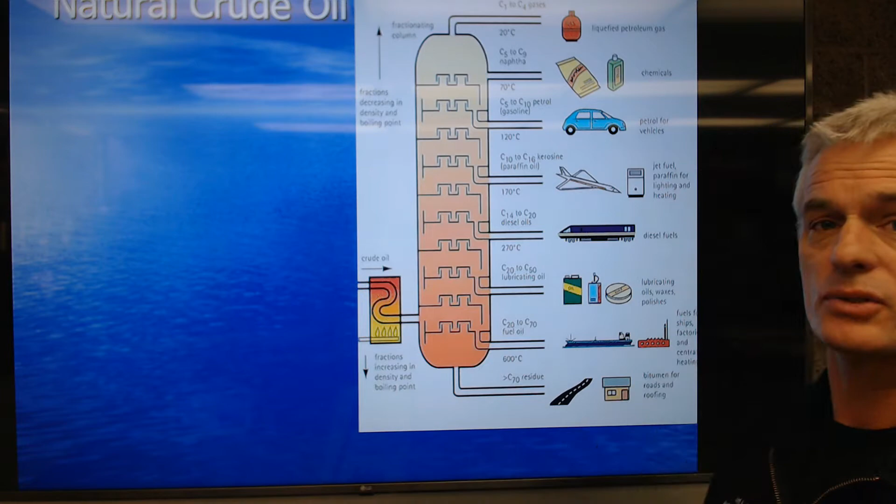So what we've got here is something called a fractionating tower, which gives you an idea of how we break crude oil into all different kinds of components. We get mixtures of what they call semi-solids, liquids and gases.

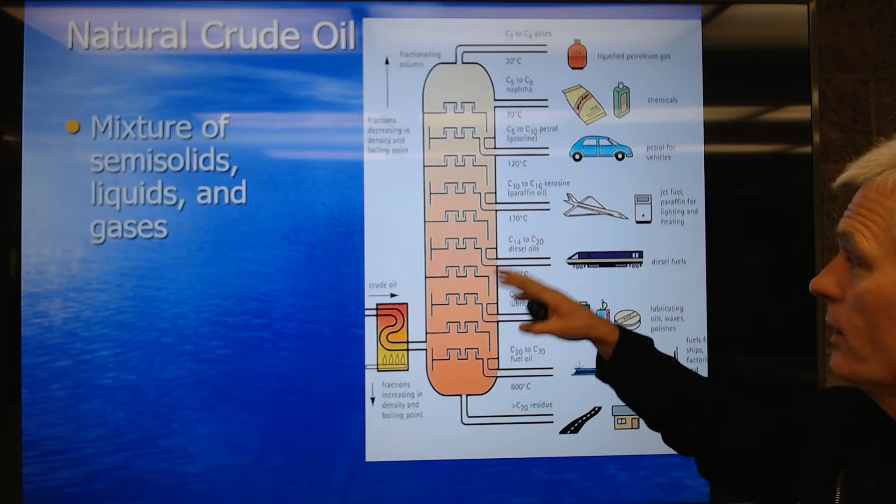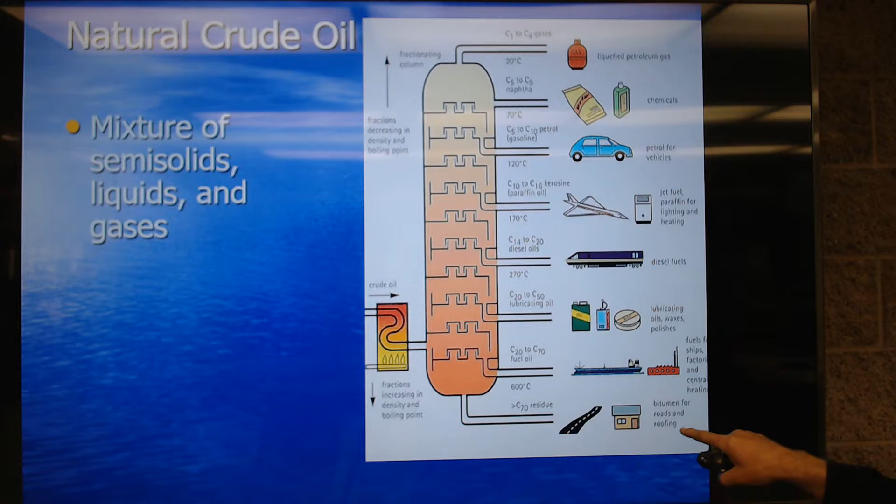When they put oil into a fractionating tower, they heat it up. The heavy stuff stays at the bottom, the lighter stuff goes up. So way up at the top is LPG. Way down at the bottom is things we use for roofing, roads, lubricating oils, waxes and polishes and things like that.

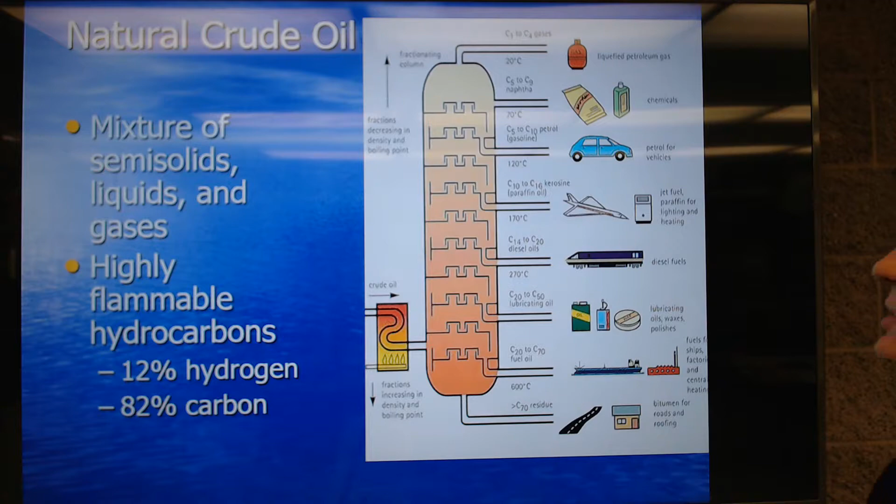So we get highly flammable hydrocarbons from crude oil, about 12% hydrogen and about 82% carbon. I'm just interested in you understanding how we get fuels and things, and what other kinds of things come out of crude oil.

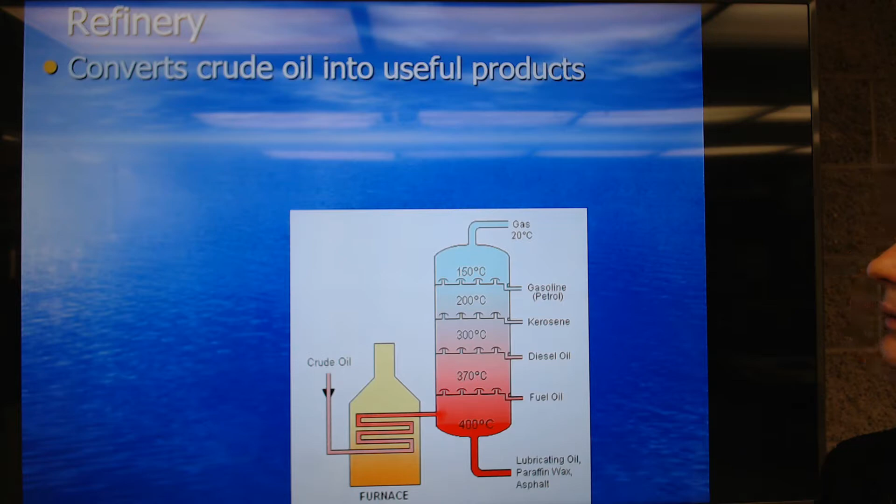So a refinery - your notes can be pretty simple on this - is going to convert crude oil into useful products through what's called a distillation process. To distill crude oil we use a fractionating tower, where we just heat up the crude oil.

Again, the lighter parts will go up, and the heavier parts stay down. So heavy fuel oil, burned in ocean liners and things like that, is down here at the bottom. Diesel oil is a little more refined. Kerosene is pretty similar to diesel, just slightly more refined. And then gasoline, or petrol as they call it in foreign nations, is a more refined fuel at the top.

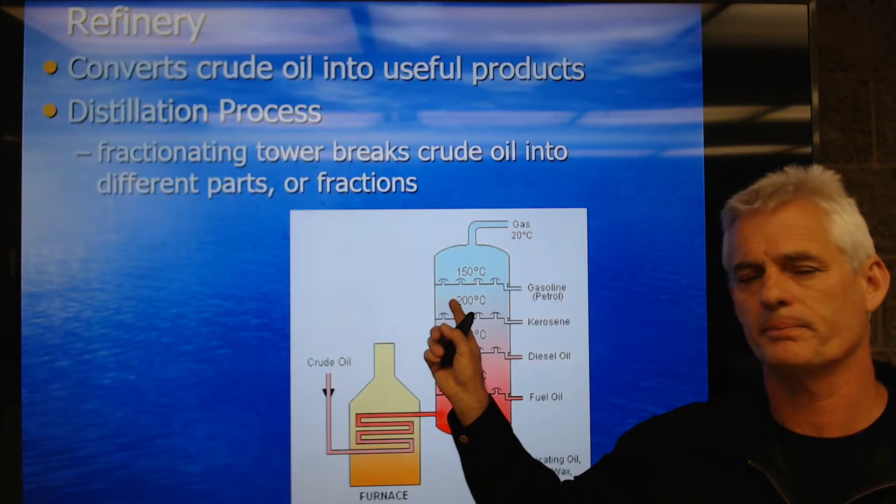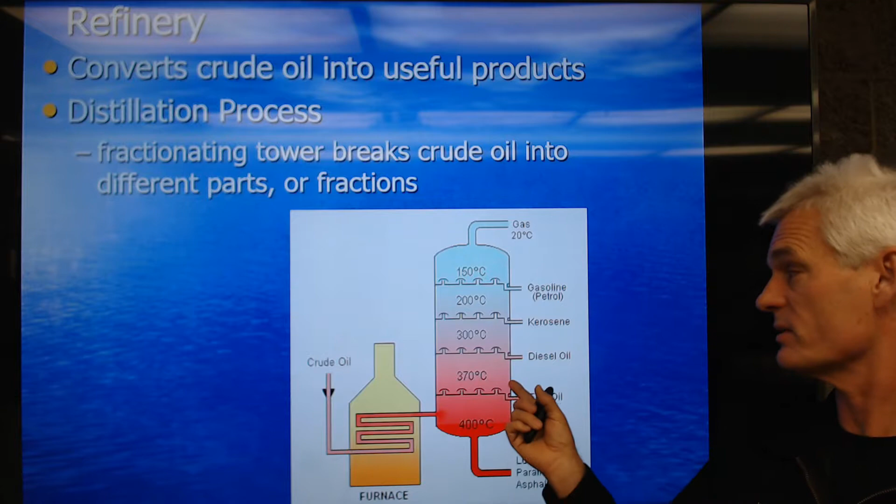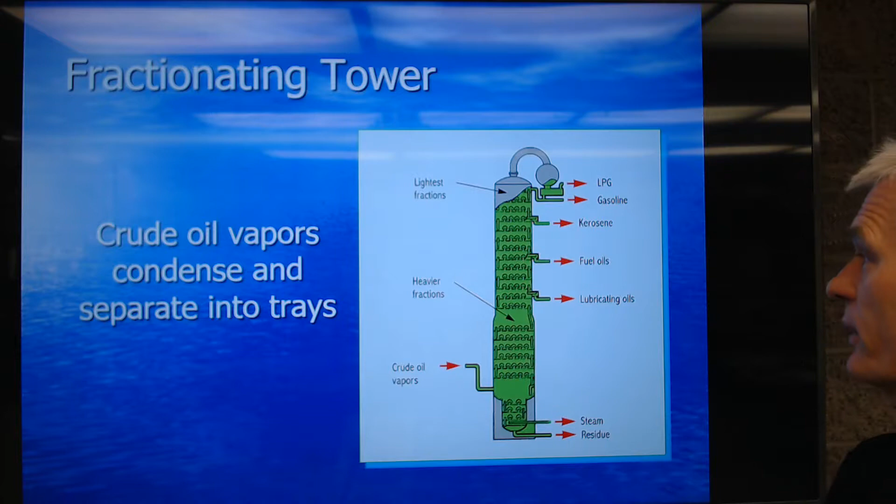In terms of cost, this is my educated assumption, the higher you go in the fractionating tower, it's probably a little more cost involved, but that's not necessarily true. In terms of distillation, diesel fuel actually has more energy in it than a gallon of gasoline, so that's kind of interesting. This is just another picture of a fractionating tower showing how they separate things into different parts as they heat it up.

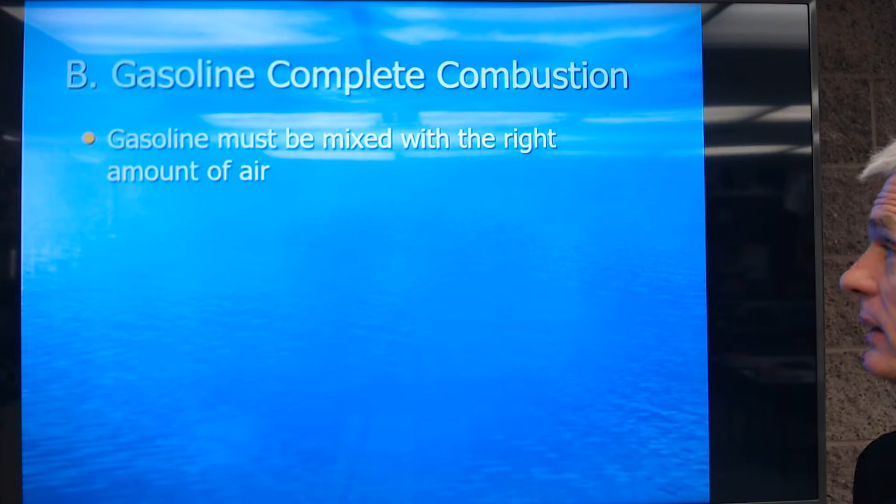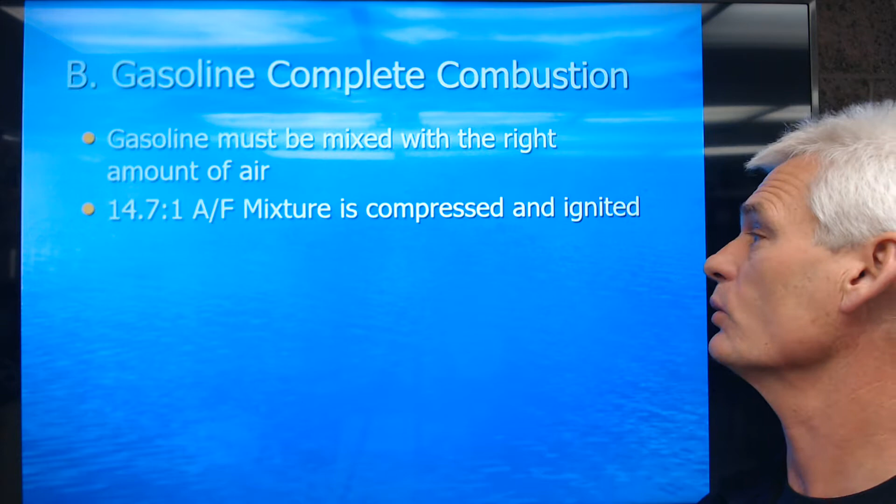So let's talk a little bit about gasoline complete combustion. We want to mix gasoline with the right amount of air, and at sea level, what we call the stoichiometric air-fuel ratio is approximately 14.7 parts of air by weight to 1 part of fuel by weight. So obviously by weight, that's a tremendous amount of air to fuel. We call that the stoichiometric, or chemically correct, or ideal air-fuel ratio at sea level.

Obviously when we burn air and fuel, we produce heat, and that heat is going to cause gases to expand. That expansion of gases causes pressure, and the pressure pushes the piston down on the power stroke of our 4-stroke cycle.

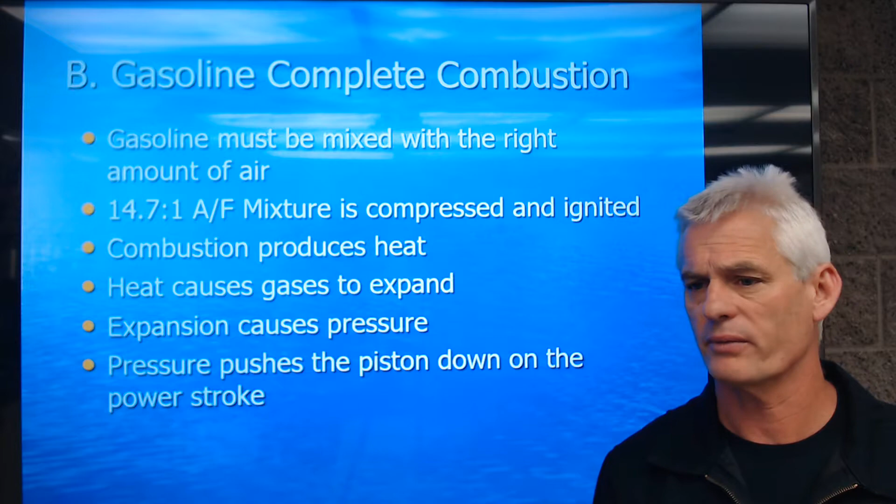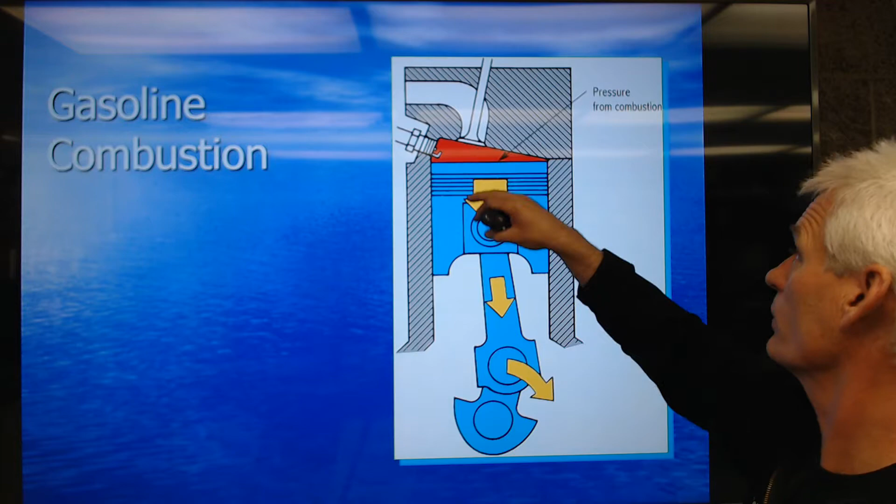So gasoline combustion looks typically like this: we have air and fuel being compressed into a highly explosive mixture. We get a spark, and as we explode, expanding gases are going to force the piston down. So normal combustion - again we're talking about gasoline engines, not diesels.

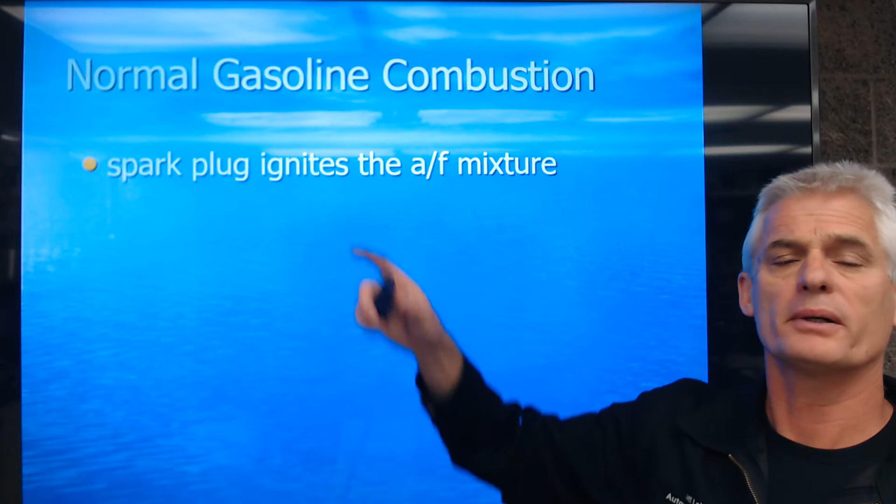A spark plug is going to ignite the air-fuel mixture, which again is around 15 to 1 or 14.7 to 1, ideally at sea level.

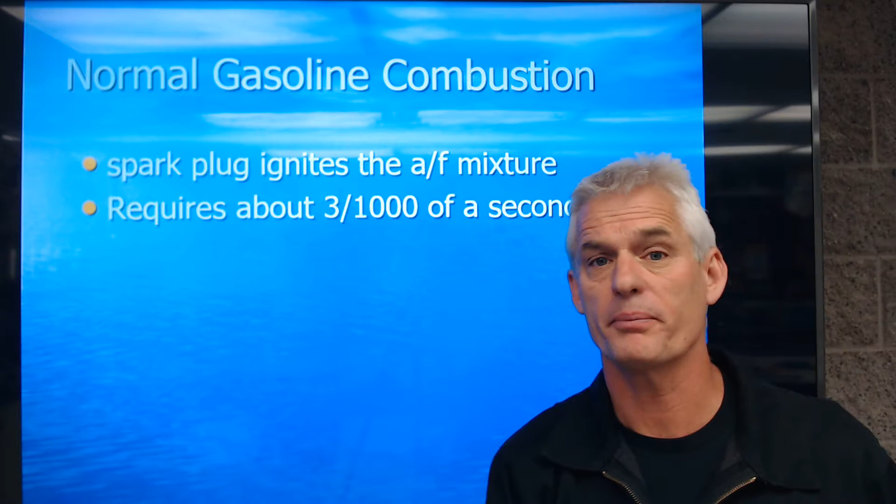It takes about 3/1000th of a second to ignite the air and fuel, depending on the RPM of the engine. Max cylinder pressure is reached a few degrees after top dead center (TDC) on the power stroke. The faster we spin the engine, the earlier we have to cause the spark to occur, so we have more time as the piston comes up for the explosion to be ready to push it down at the right time.

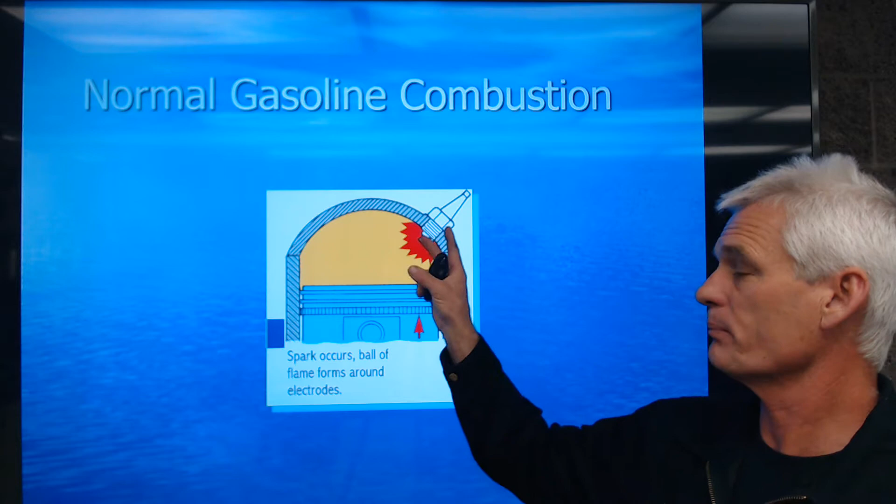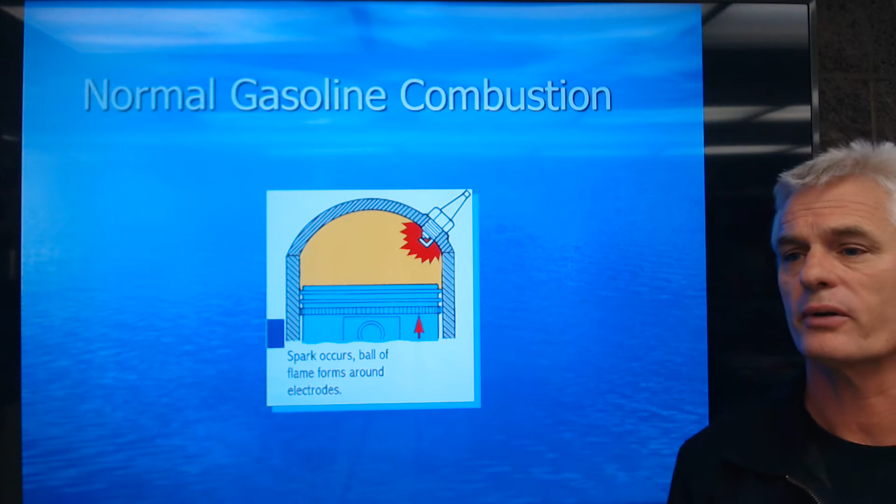This shows normal combustion, where you get a flame front beginning at the spark and burning across the combustion chamber. This would be a hemispherical combustion chamber design, or what we call a Hemi. It's really good for power and really good for emissions, and most engines today use a modified version of this.

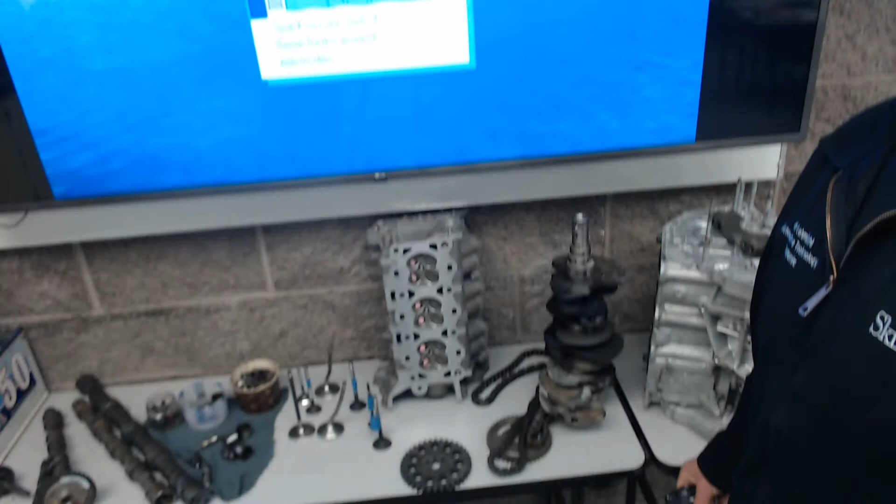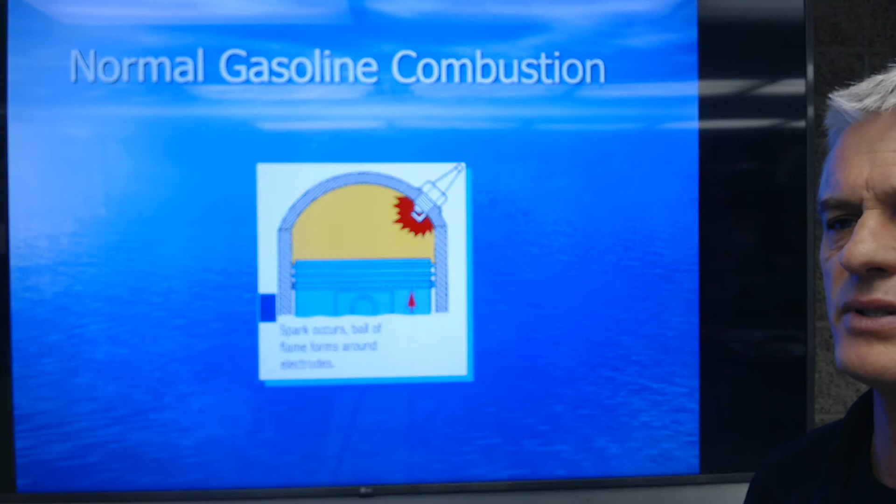I'm going to move the camera down so you can see that this Ford Duratec cylinder head has what we'd call a modified Hemi. It's not a true hemispherical, but the valves are canted in right and left like a Hemi, and the spark plug comes down the center like a Hemi. So it's a modified hemispherical design, and everybody seems to have some version of this to affect how combustion happens in the cylinder these days.

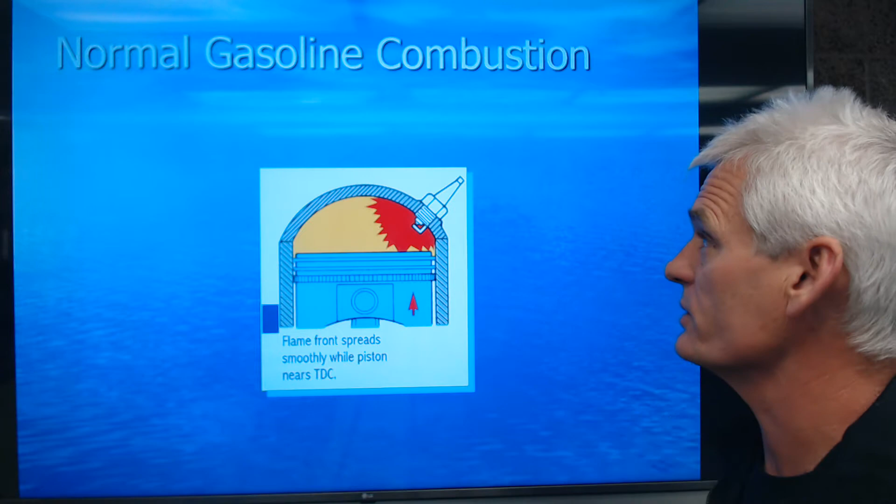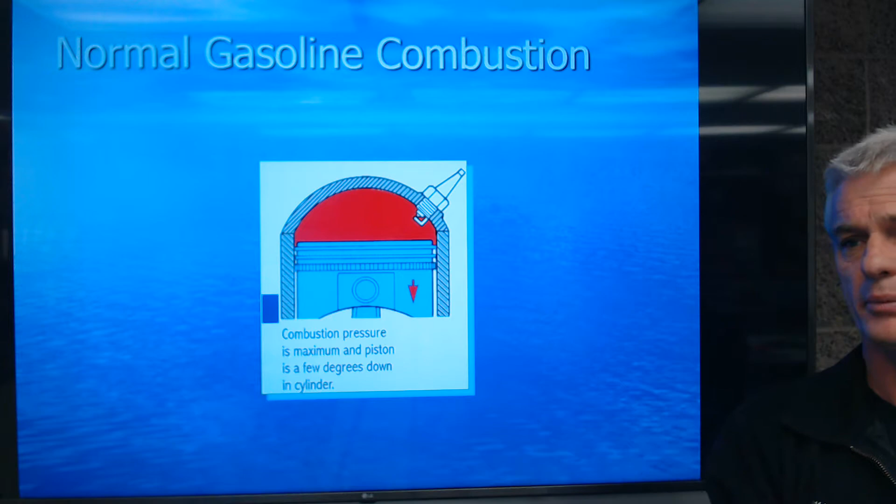This shows how, as normal combustion occurs, the flame front proceeds across the combustion chamber. Once the piston reaches TDC, the flame shoots through the chamber, forming heat and expanding gases, which push the piston down. That's all they're showing here—kind of belaboring the point, I know. Let's keep going.

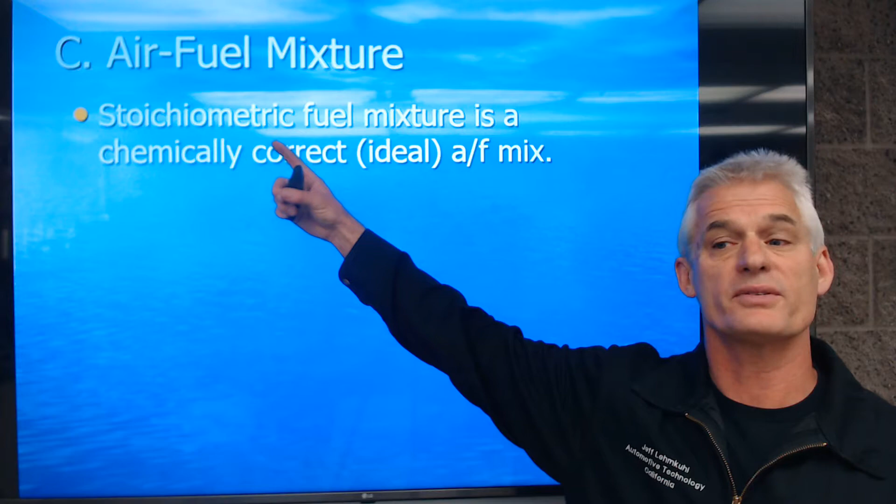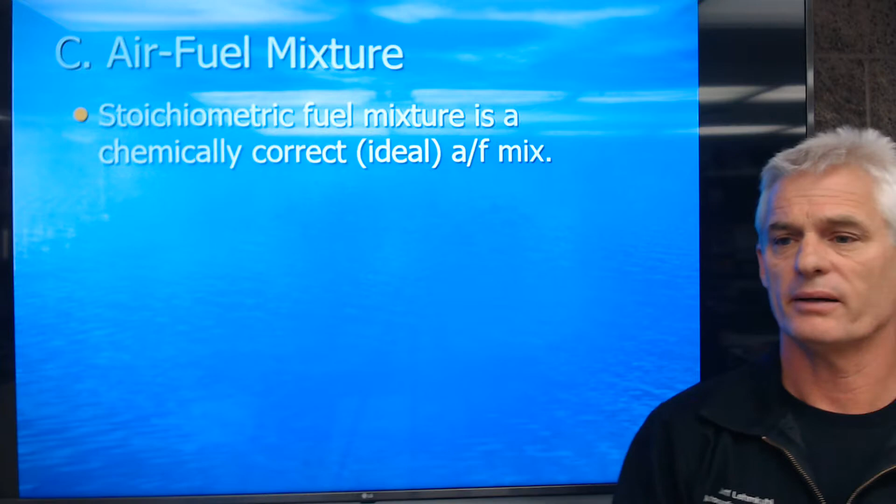Our ideal air fuel mixture—the one that produces as much power as possible, gets the best gas mileage, and produces the least emissions—is what we call stoichiometric, meaning chemically correct or ideal. The ideal mixture is 14.7 parts air to fuel at sea level, by weight.

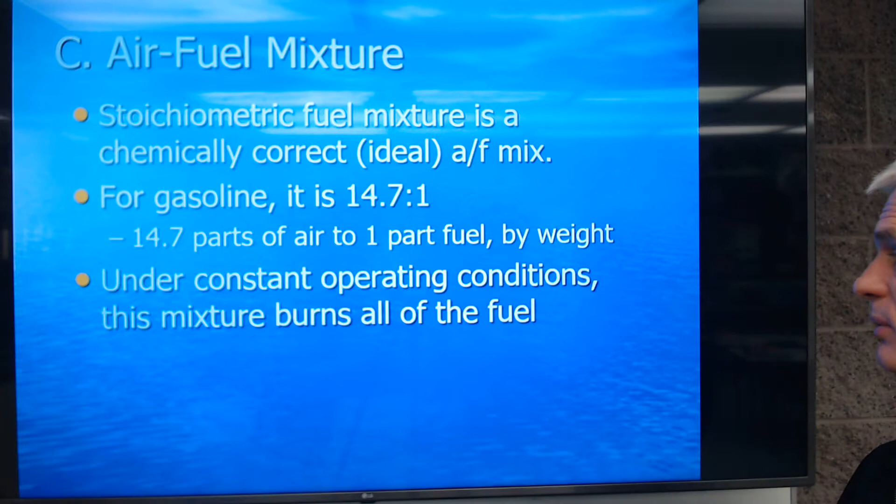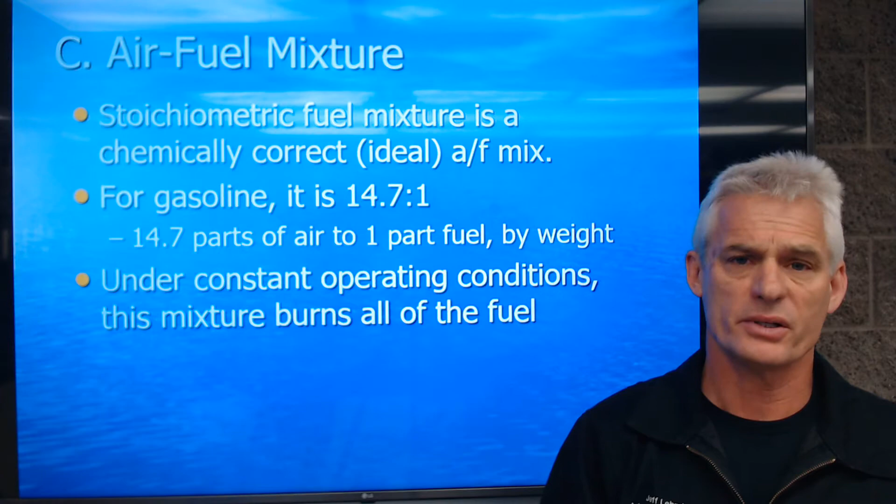Under constant operating conditions, the mixture is said to burn all of the fuel, but that's not really the case. We don't burn all of the fuel—we always have some leftover hydrocarbons and other pollutants. We'll talk about that in a moment, but that's pretty normal.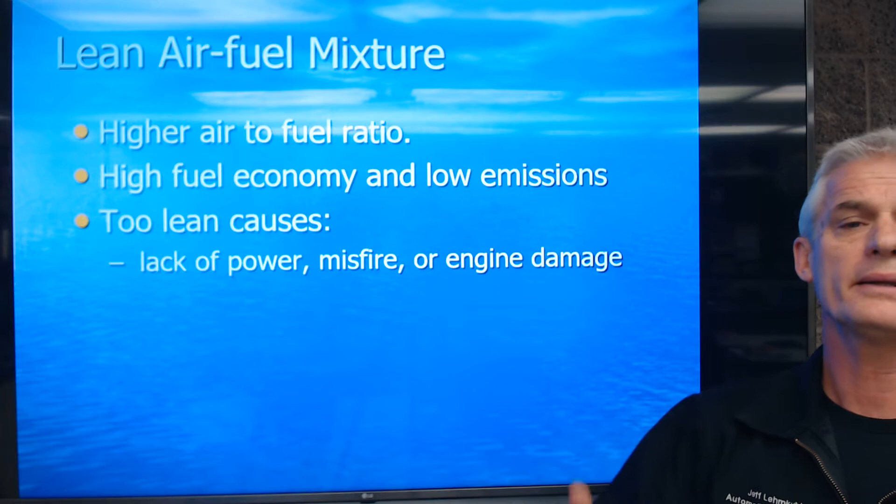A lean air fuel mixture means a higher air to fuel ratio, like 15:1 or 16:1—more air relative to fuel. This gives really good economy and mostly lower emissions, lower hydrocarbons and carbon monoxide, but if it gets too lean, hydrocarbons go back up and you make too much oxides of nitrogen, another pollutant. Too lean causes lack of power, misfire, and potentially engine damage if it gets really lean, because lean mixtures raise engine temperature—more oxygen means more heat to a point, and that can melt things.

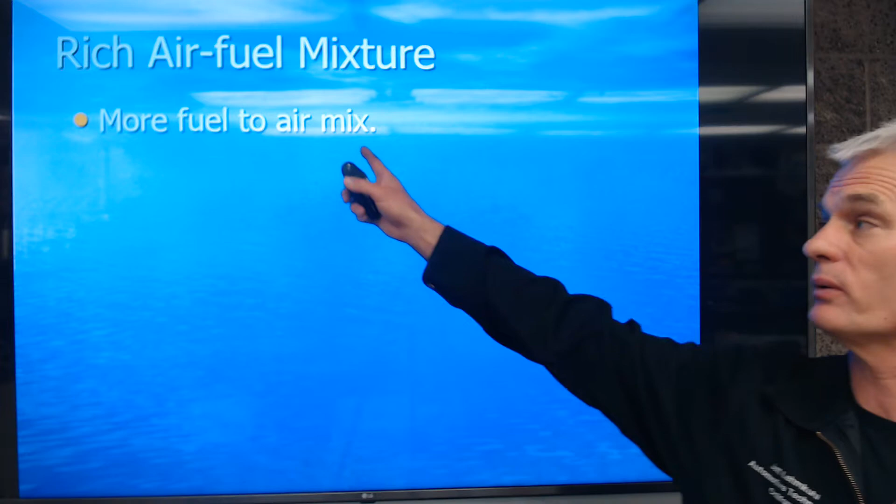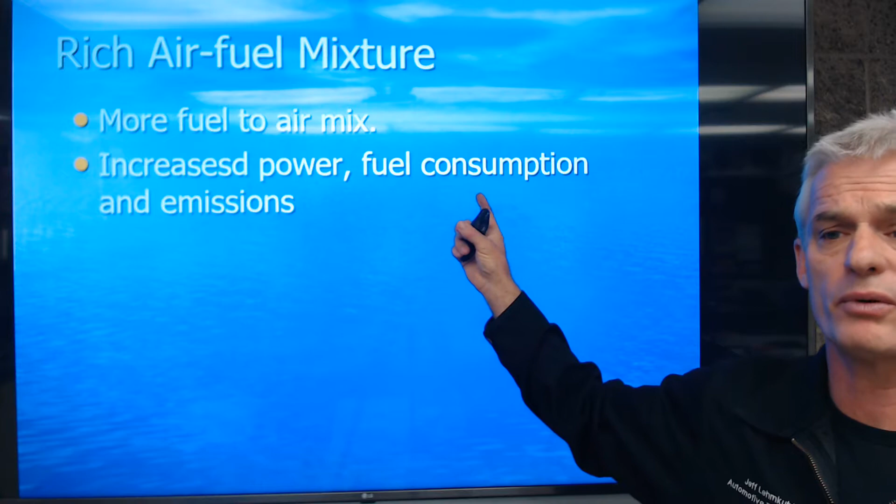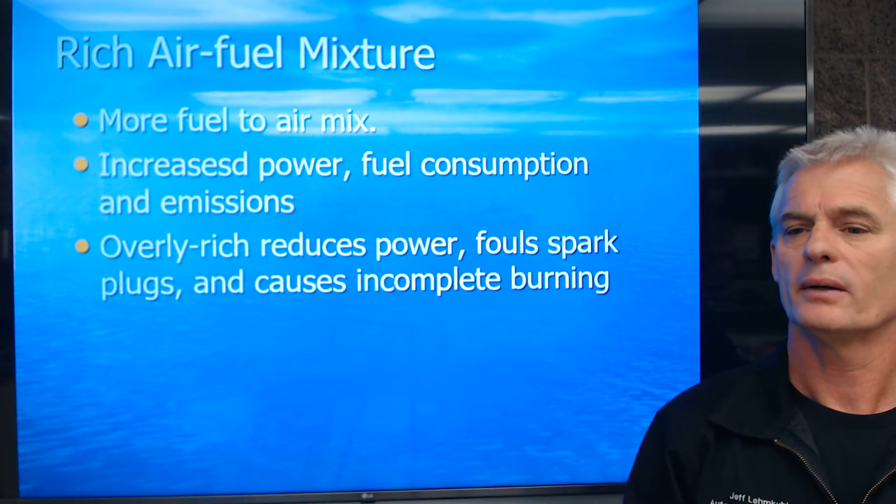A rich air fuel mixture has more fuel relative to air, like a 12:1 or 13:1 ratio. This tends to make more power but gives worse gas mileage since you're consuming more fuel, and it tends to pollute more. Pollution goes up when we're real lean, and also when we're real rich—around the stoichiometric ratio is where emissions are minimized. Overly rich mixtures reduce power and foul spark plugs—fuel soot builds up on the side-to-center terminal, causing the spark to jump through the fuel without igniting it, which leads to incomplete burning and the check engine light coming on.

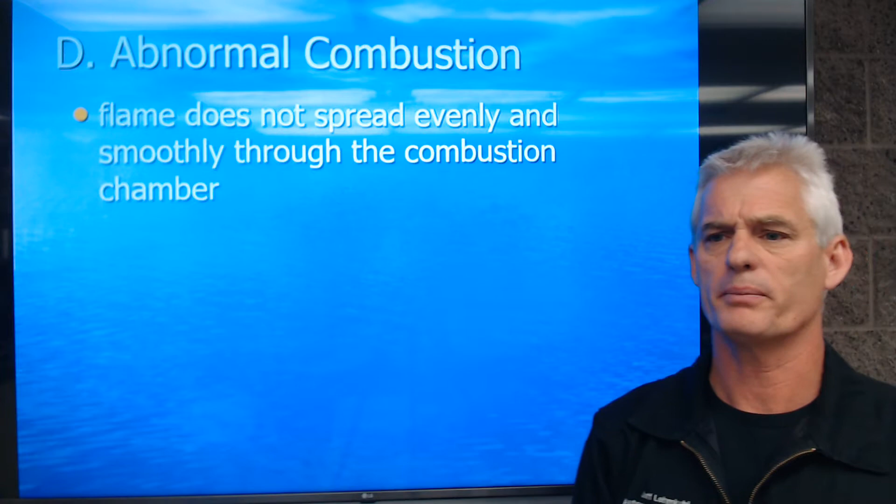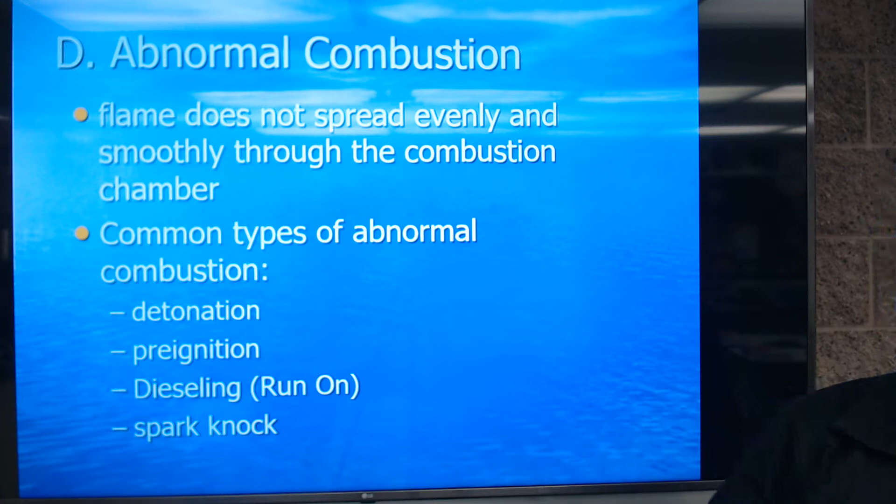So let's talk a little bit about abnormal combustion—when the flame or flame front doesn't spread evenly and smoothly through the combustion chamber. Here are our common types of abnormal combustion, and we're going to talk about each one in the following slides.

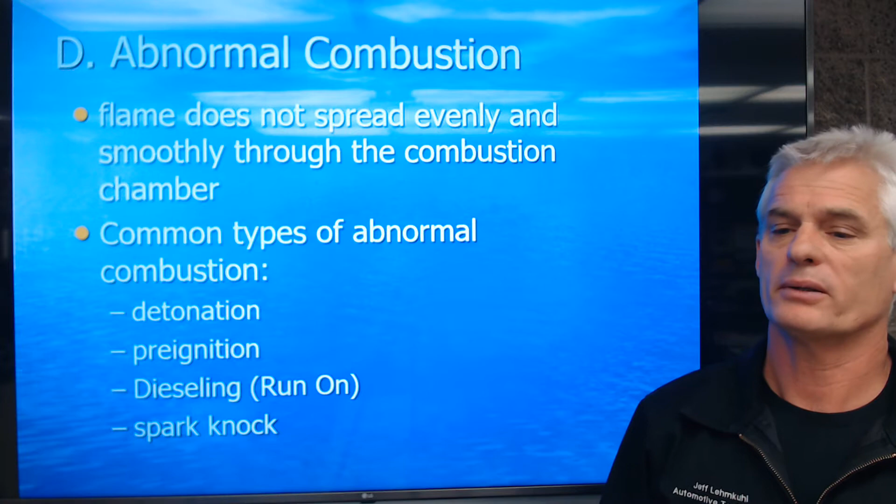Common types of abnormal combustion are detonation, preignition, dieseling, and spark knock. Detonation, preignition, and spark knock are real similar—they're just caused by different things. Some people call them pinging, but they're basically three different types of detonation. So let's talk about them.

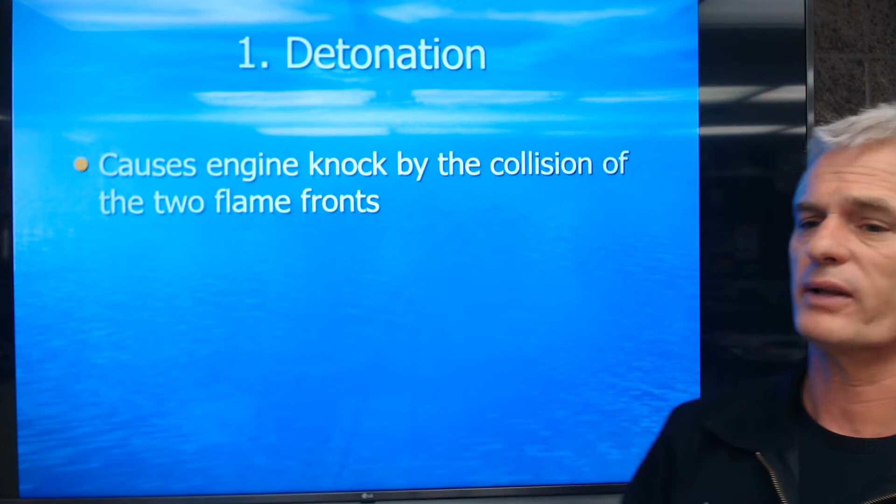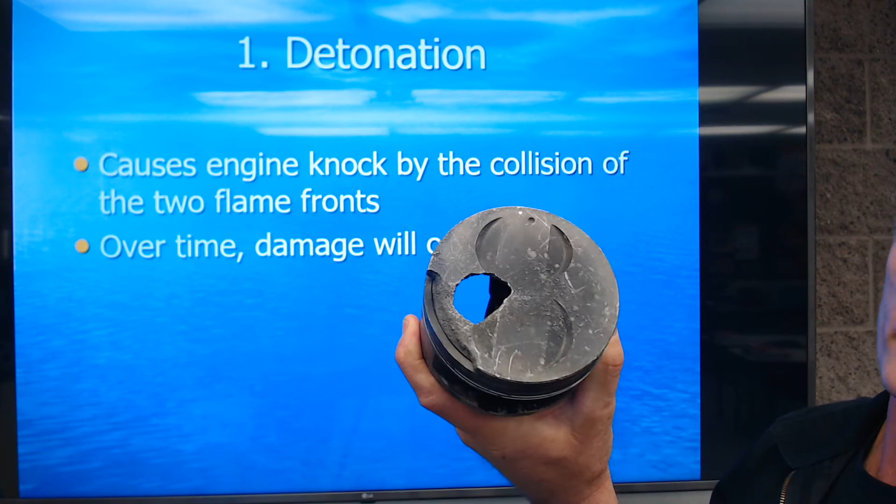Detonation causes engine knock or pinging by the collision of two flame fronts, and we're going to show this. Over time, damage will occur. Here's a piston that burned a hole, beat a hole right in the top because it was detonating. This engine was towing a horse trailer and was probably running 87 octane fuel, which is too low an octane and tends to knock more. Eventually it beat a hole in the top, and we'll talk about how that happens.

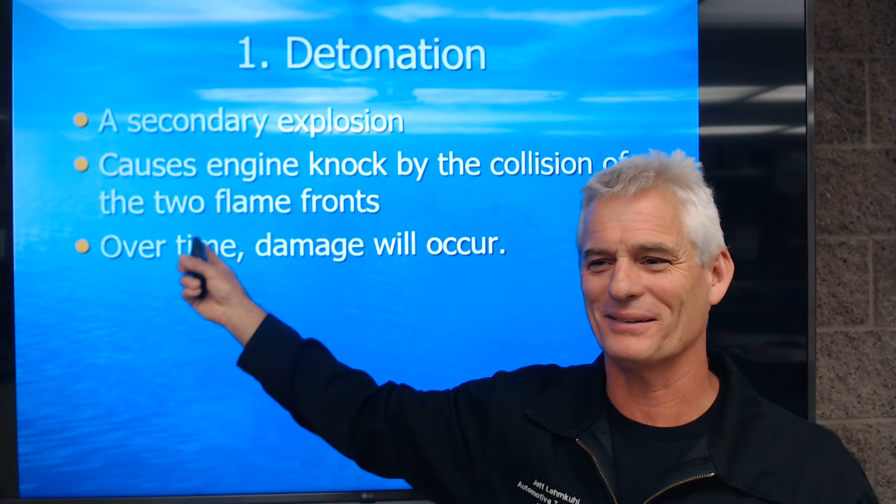So detonation is a secondary explosion. Sorry about the way this came up, that was kind of tricky. A secondary explosion that's going to cause engine knock and eventually cause damage to the engine.

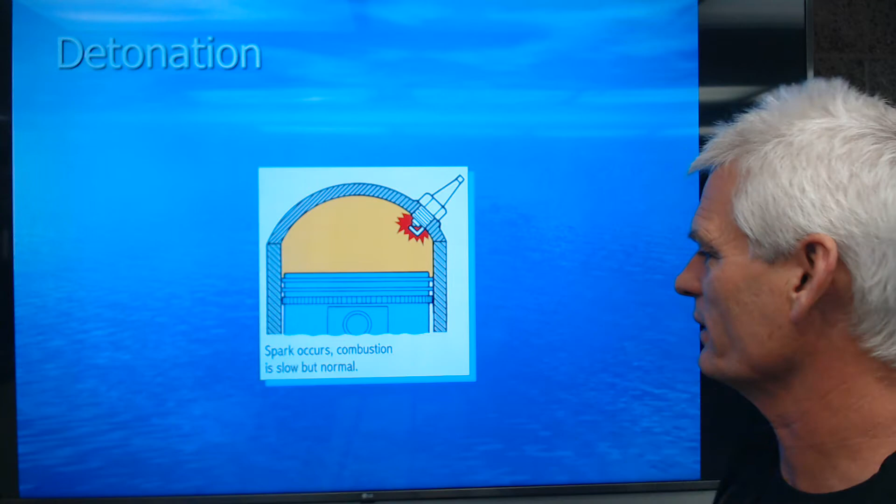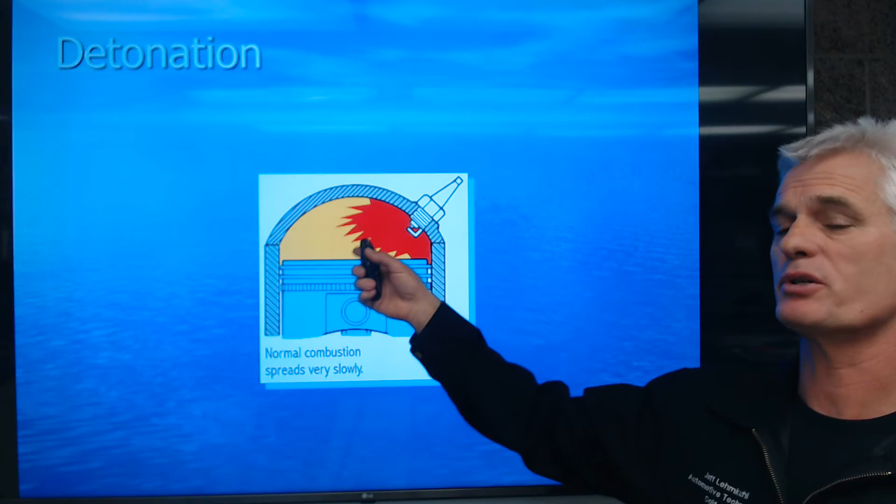So detonation goes like this. We ignite the air and fuel with a spark, and it starts burning, okay? And then as it continues to burn across the flame front, watch what's going to happen here—we're going to get a secondary explosion here. And that secondary explosion and this explosion are going to cause a sonic shock.

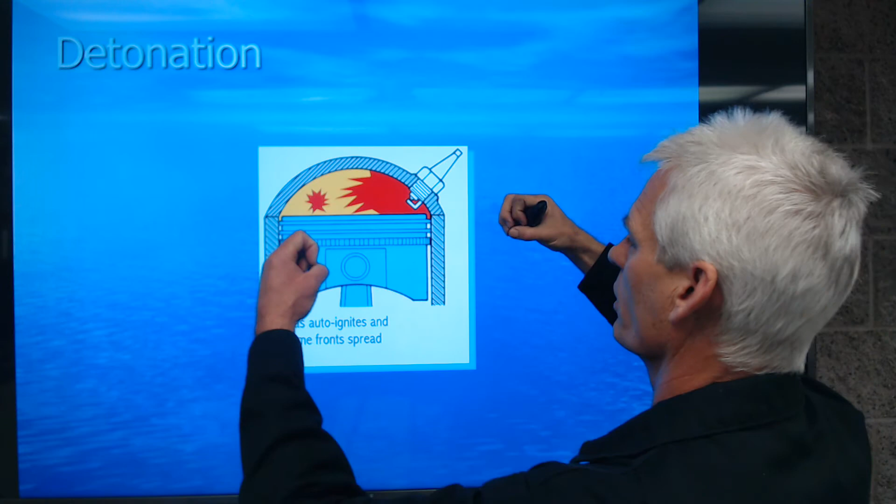So you're going to have basically a sound wave hitting and a shock, and the consequence is it's going to rattle the piston back and forth and beat on it. So there's a couple of different flame fronts colliding, if you will, and you get a big pressure spike. This can be caused by low octane fuel, engine overheating, improper ignition timing, and things like that. We'll talk a little more in a moment here.

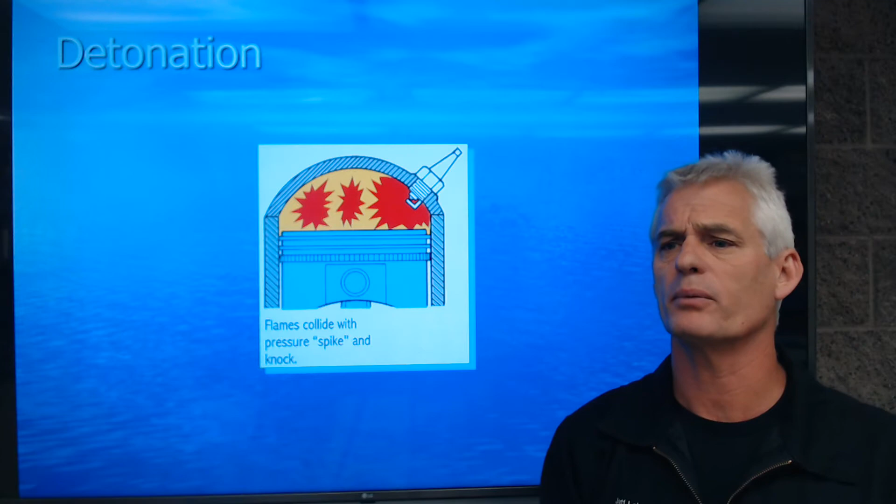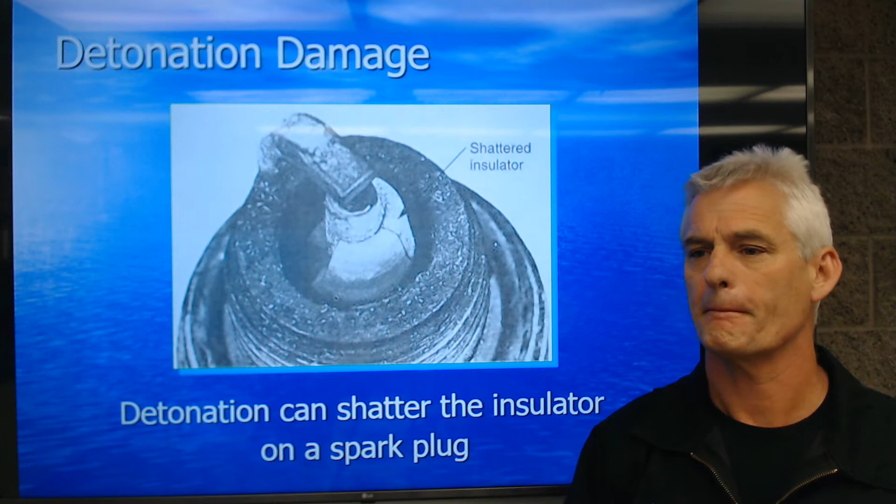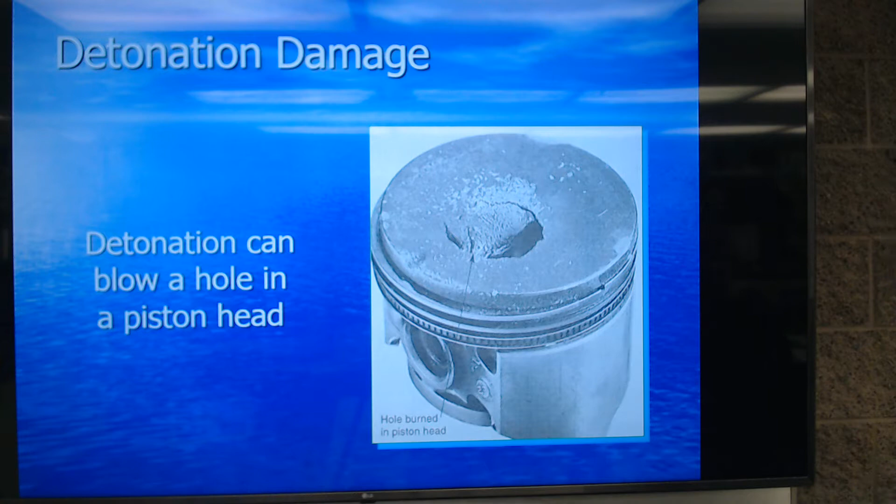There's a piston that's just like the one I showed you, where detonation has beat a hole in the top of the piston. And that doesn't happen overnight—it takes time. You've got to really not pay attention to the way the engine sounds to get that to happen. Because we have knock sensors these days, hopefully this doesn't happen so much anymore.

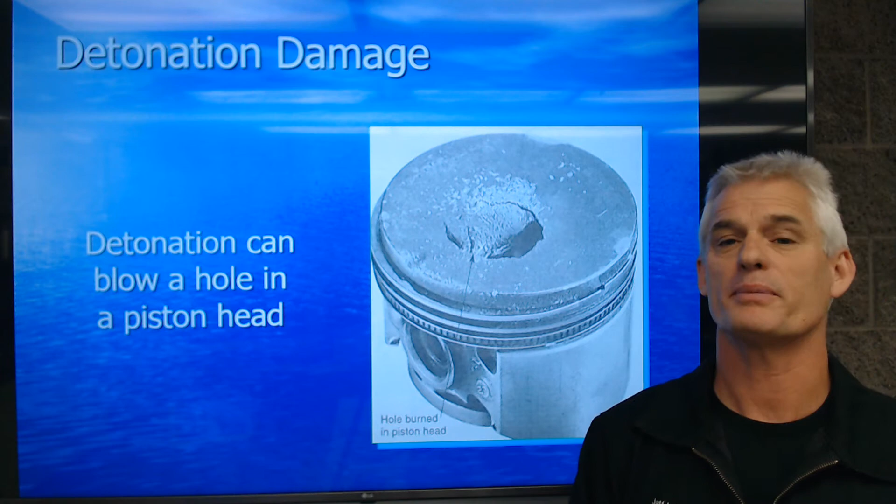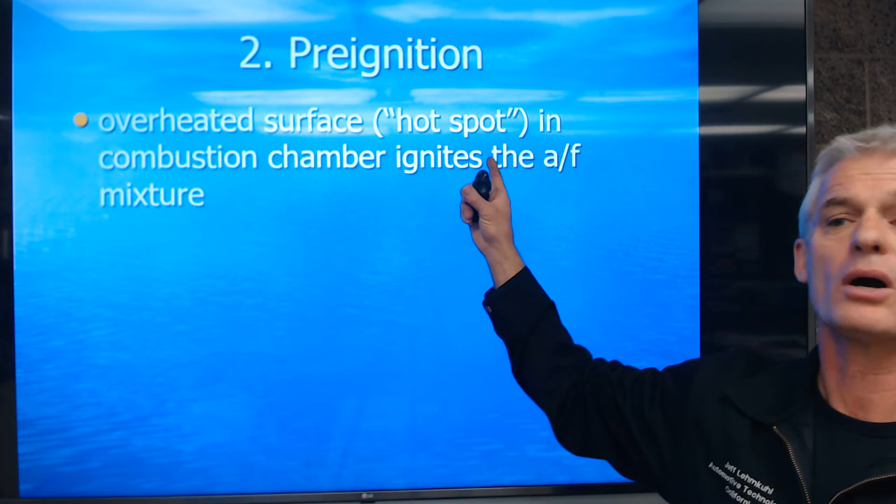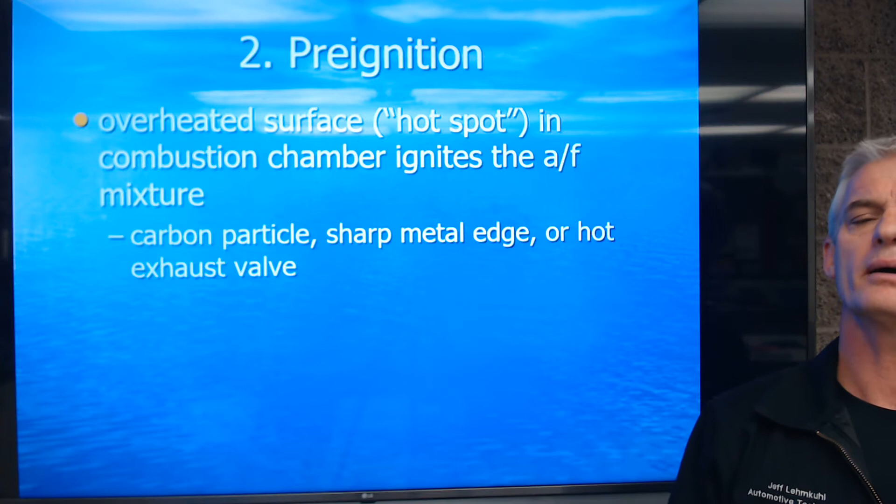So let's talk about preignition. Preignition is a type of detonation. Preignition occurs because an overheated surface, like a piece of carbon in the combustion chamber, actually causes a secondary explosion. So this isn't caused by low octane fuel or something like this—this is caused by something inside the combustion chamber glowing, and it ignites the air and fuel. A carbon particle, a sharp metal edge, or a hot exhaust valve—if the exhaust valve isn't getting cooled like it should be, it's too hot, maybe because the air fuel mixture is a little bit lean. But typically preignition means something else is causing a secondary igniting of the air fuel mixture.

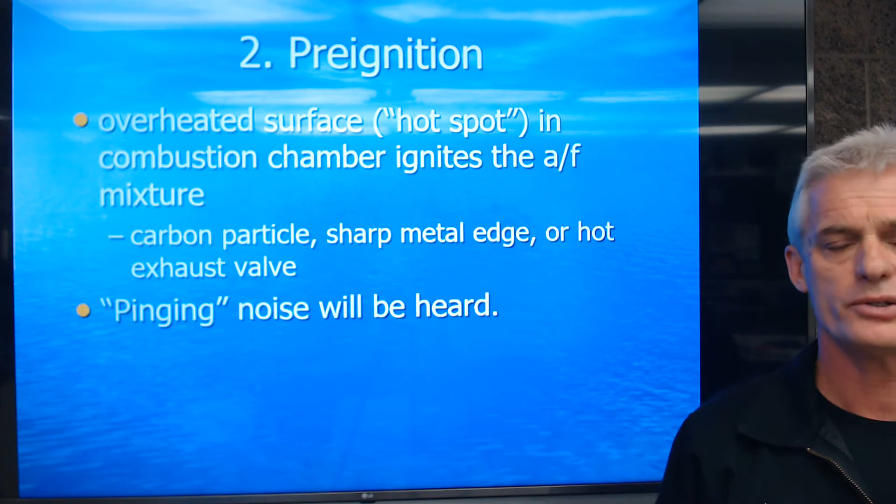In all cases, whether it's regular detonation or preignition, you are going to hear a pinging noise unless you have a detonation sensor or knock sensor, which is going to retard the timing, getting rid of it so you may not hear it. And if you're a teenager and your stereo is too loud, you're not going to hear it anyways, okay?

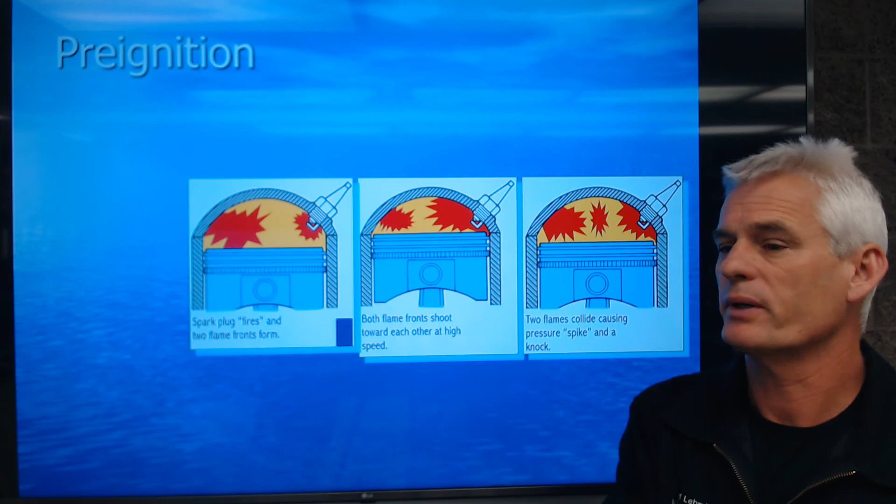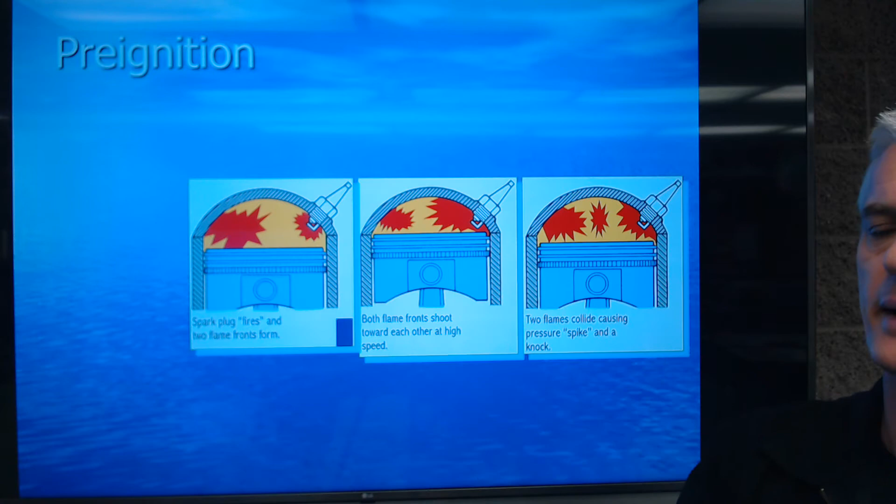All right, so here's preignition. Preignition means I ignite the spark, but I get a secondary explosion because there was a piece of carbon over here that caused it. The two flame fronts collide, rattle the piston, beat holes in the top of it, etc.

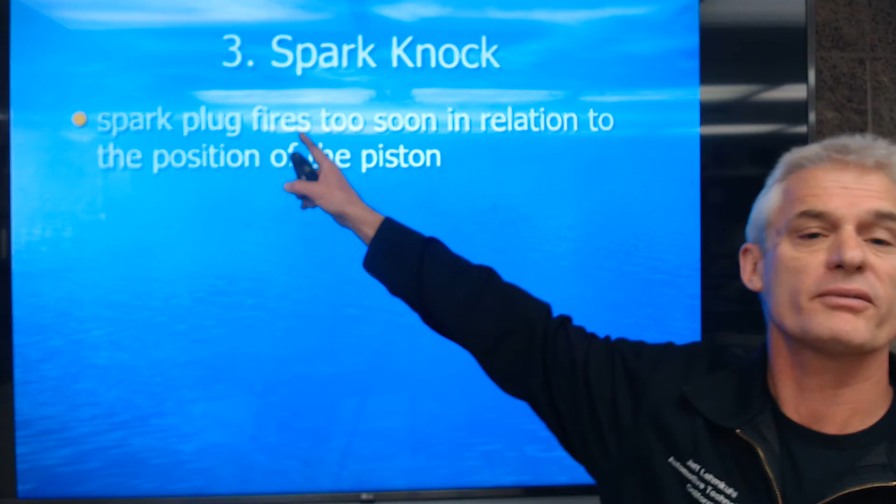So spark knock—spark knock is another type of detonation. Spark knock occurs when the spark plug fires too early. So the piston's coming up, and instead of, let's say at idle, or at 3,000 RPM, the spark occurring at 45 degrees before top dead center, we start the spark at 55 degrees before top dead center.

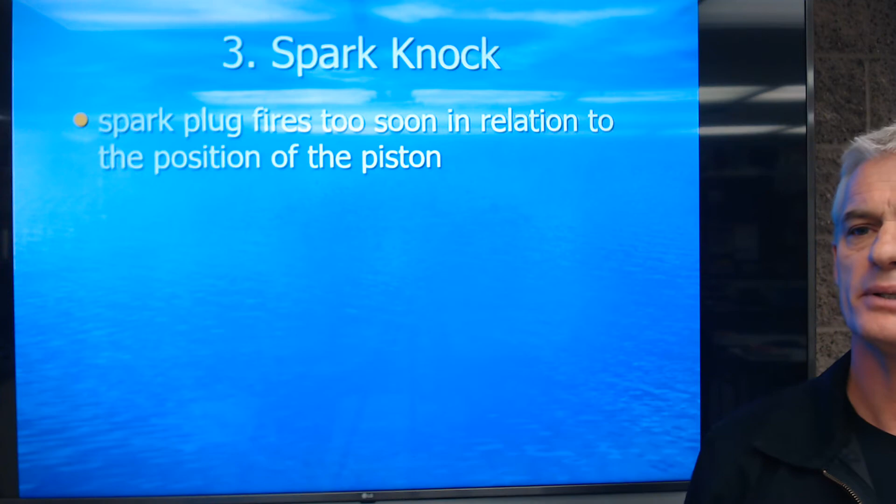So as the piston's still coming up, the pressure rise is too much too early, and then the pressure rise causes a secondary explosion because the pressure has gone up so high, and the two flame fronts collide, and you hear the pinging where you damage the piston. This happens because our spark timing, when the spark occurs in the cylinder, is too far advanced or too early in relationship to where the piston is.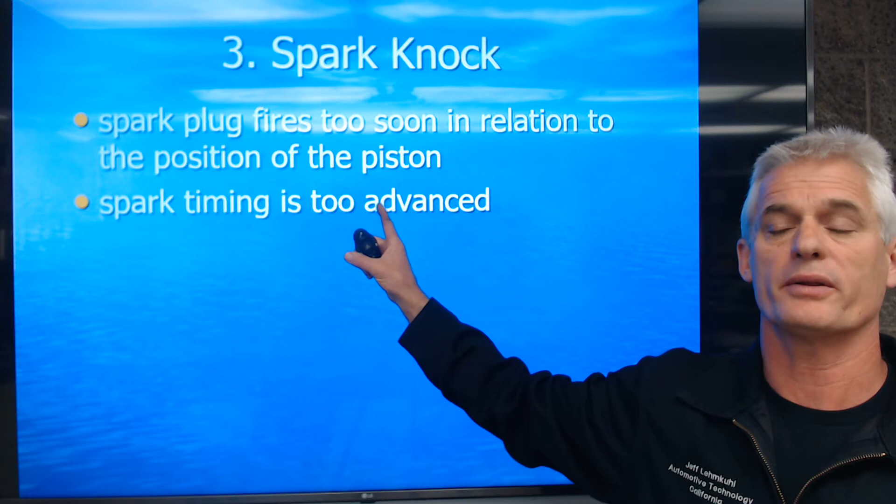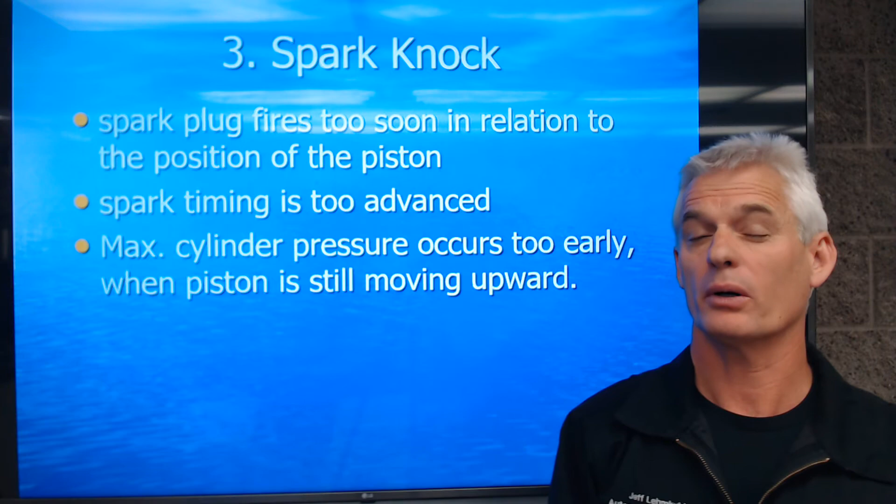So max cylinder pressure occurs too early when the piston's still moving up, and then we get the flame front colliding. Maximum cylinder pressure gets too high too early, and as the piston's coming up, it's trying to push against too much combustion pressure, and we rattle the piston.

So spark knock causes pinging or knocking under load, and we're going to check the timing first and make sure it's not the cause, because it could be. If the timing's correct, we want to look for causes of preignition.

But any car that does not have a distributor, which is pretty much everything for the last 25 years, unless you're a Honda, 20 years, we can't set ignition timing anymore. So we usually don't go looking at timing. We can plug in the scan tool and look at the ignition timing, but it's usually bouncing around because the computer's adjusting it.

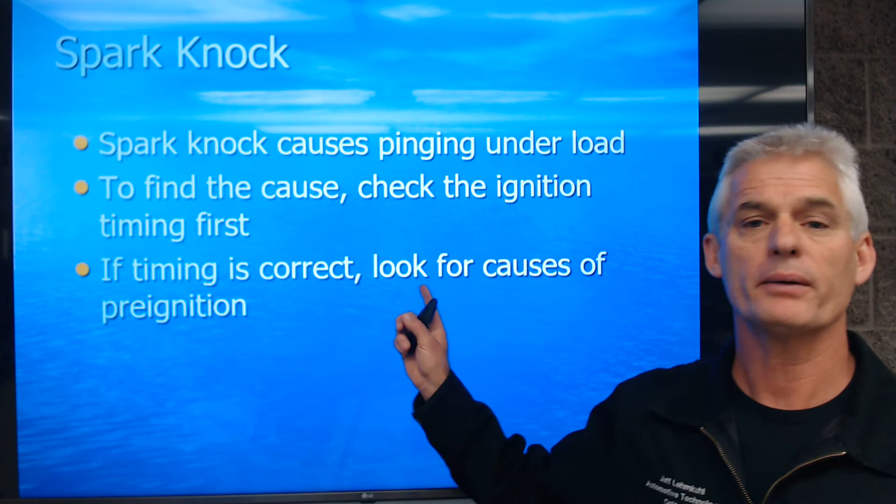So we might want to look for causes of preignition, which means we may want to run some fuel injector cleaner through it to try and clean the carbon off the backs of the valves and the tops of the pistons. There's other ways we can do an induction service, where we run a cleaner down through the intake manifold to hopefully clean off a lot of what's on top of the pistons.

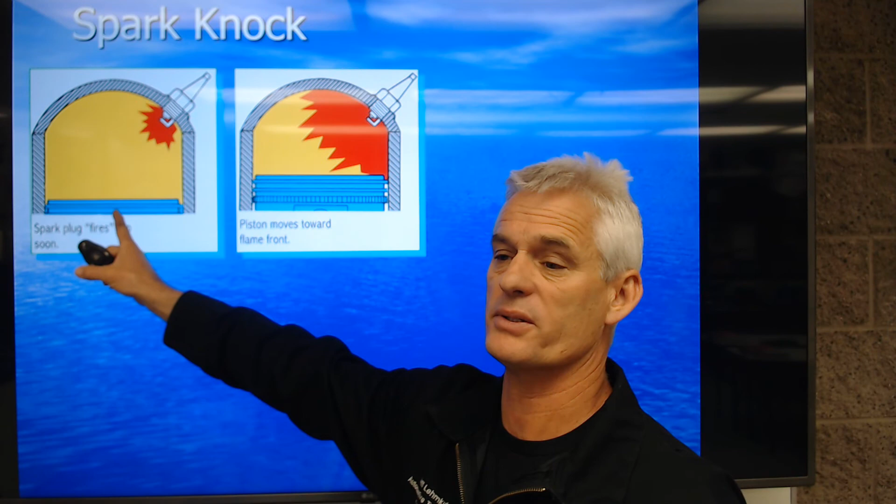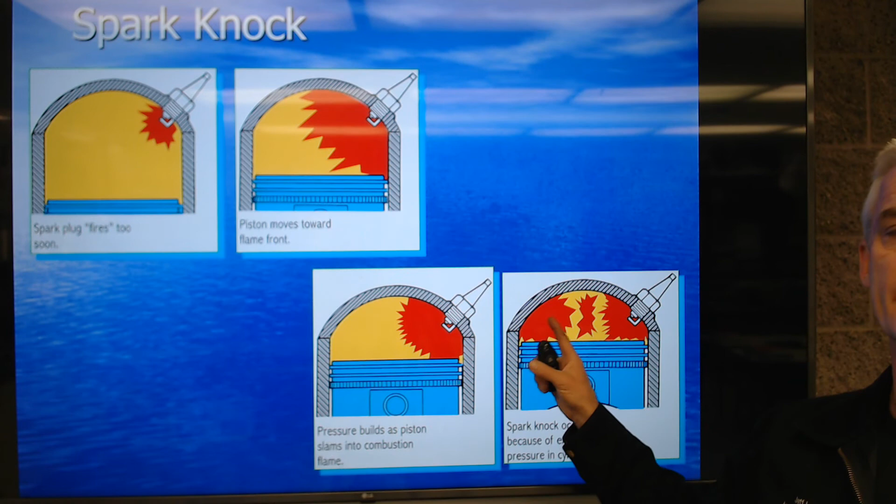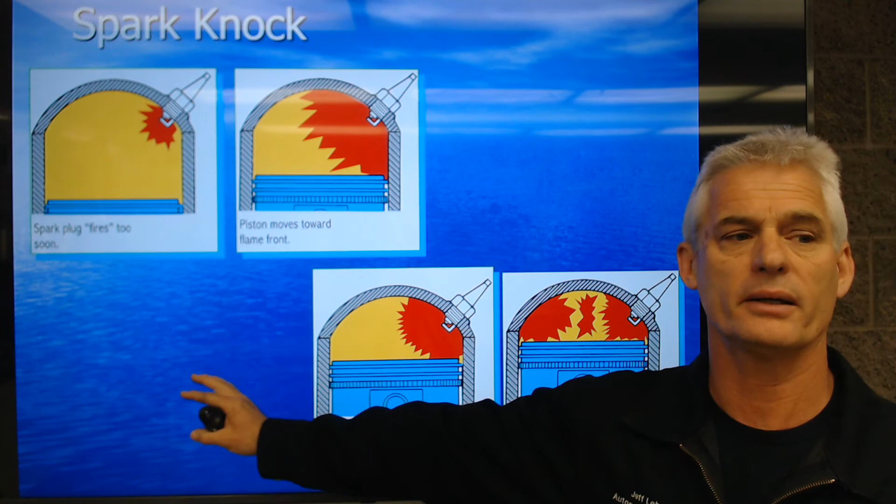So spark knock is just showing the plug starts too early, the piston's still coming up, the pressure is too great, and we get knocking. So it's just showing the pressure building, and then we get secondary explosions as a result. These are all different reasons for getting secondary explosions that we don't want. We want the flame to burn consistently and evenly across the top of the piston.

So dieseling is essentially another type of detonation, but it's a detonation that occurs once I've turned the engine off. So I shut the engine off and the engine basically keeps running, and it sputters and knocks and finally gasps and shuts off. This happens on a gasoline engine.

It's a little bit confusing when we call it dieseling. The true name of it is run-on, engine run-on. That's the accurate name, but most everybody calls it dieseling. And it's mostly an old school carbureted car phenomenon.

We don't have this on injected cars anymore because when we shut the ignition off, we're turning the fuel pump off, so no fuel can be sprayed in, so the car can't run. If I have a leaking injector on an injected car, then the car can actually keep running. But it used to happen on carbureted cars a fair amount.

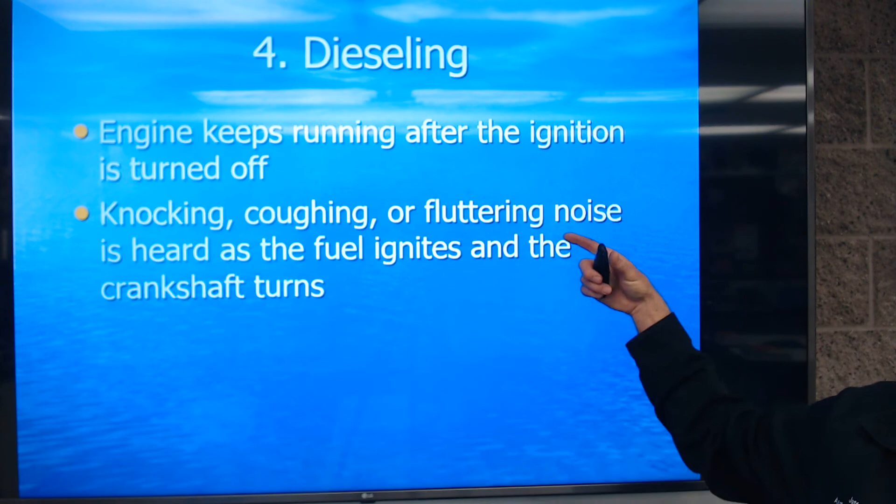We would get coughing, knocking, and all kinds of weird noises as the fuel ignites and the crankshaft turns. So I shut it off and it keeps going, and finally it shuts off. Many times the crankshaft will spin backwards when it finally shuts off.

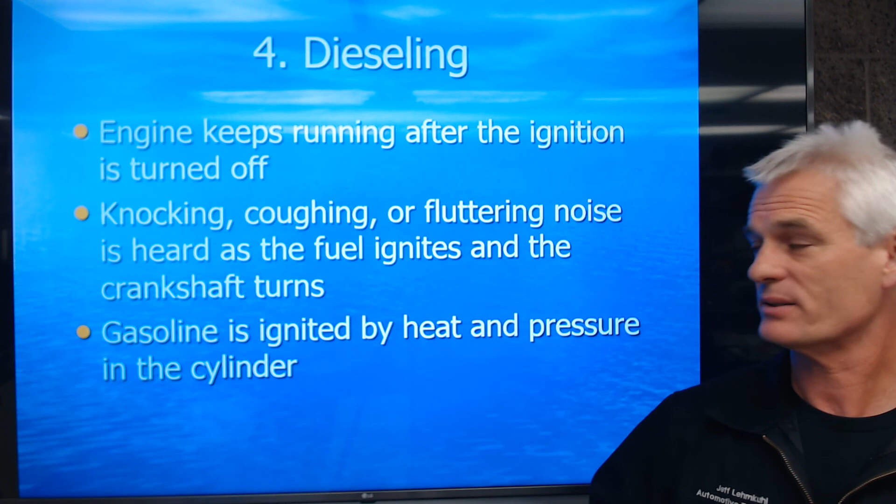So gasoline is ignited by heat and pressure in the cylinder. Mostly, if I have a carburetor and the idle speed's a little too high, the throttle plate's open a little more than it should be, I shut the engine off, and as the pistons are slowing down, the vacuum from the descending motion of the piston is still sucking fuel past the throttle plate, and with fuel and air still there, it'll still try to fire.

So a high idle speed or too much idle speed typically causes this, along with engine overheating and a few other things like that. I think it's going to list what they are.

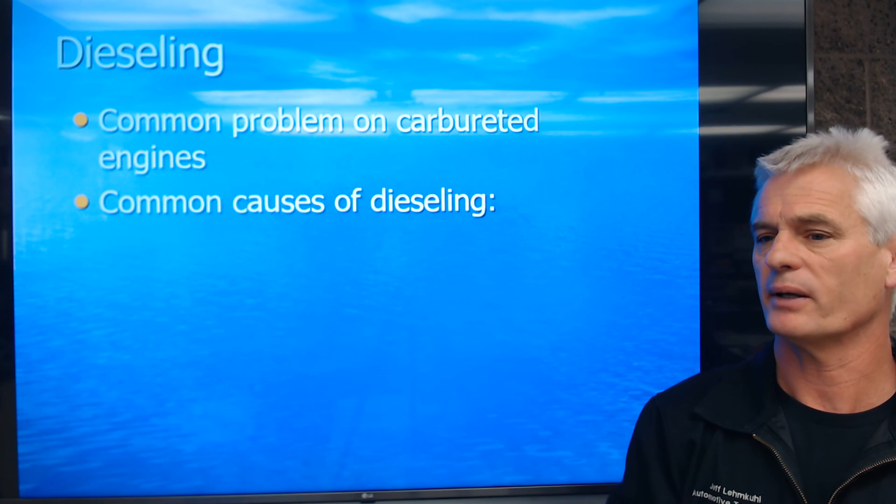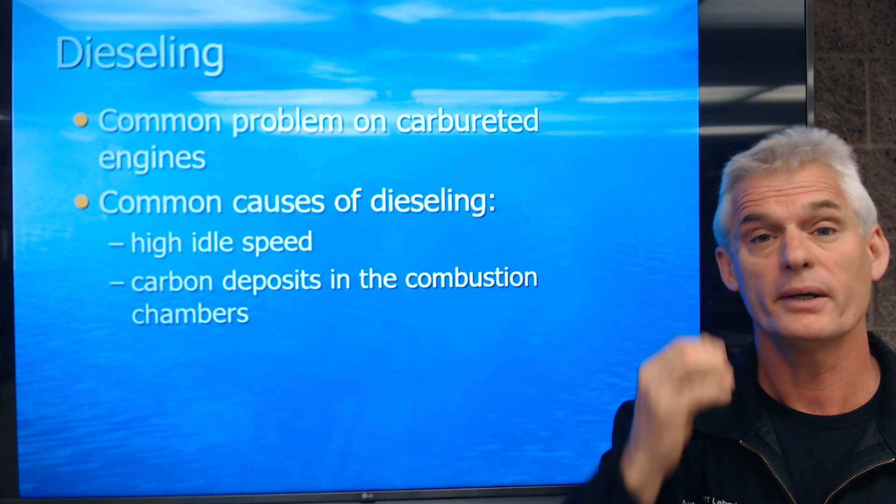Common causes: high idle speed, carbon deposits in the combustion chamber, so there's still something glowing to ignite air and fuel in the cylinder, even though I've shut the spark or coils down. Low octane fuel can cause it. Engine overheating should come up, yeah, engine overheating, and then spark plug heat range too hot. Don't worry about this one, that's kind of an old school thing.

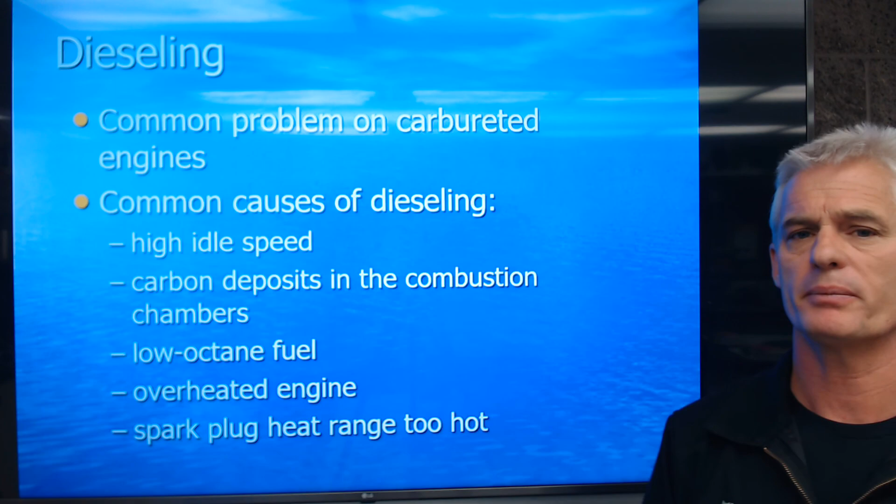But low octane fuel, engine overheating, high idle speed—again, it's a carbureted car problem almost exclusively, unless we have a leaking injector, then it's possible this could happen. But this is an old school kind of problem, engine run-on.